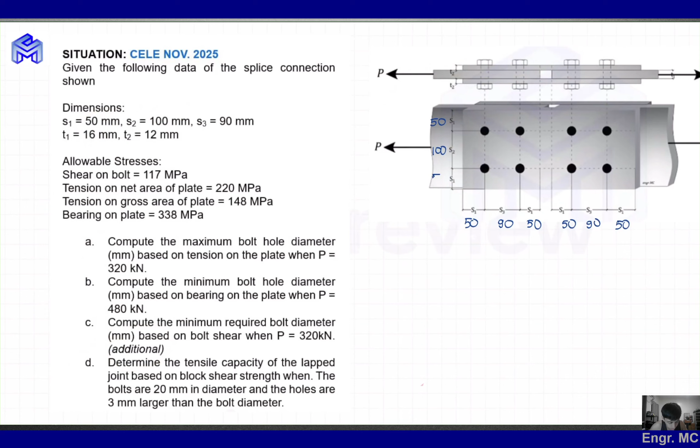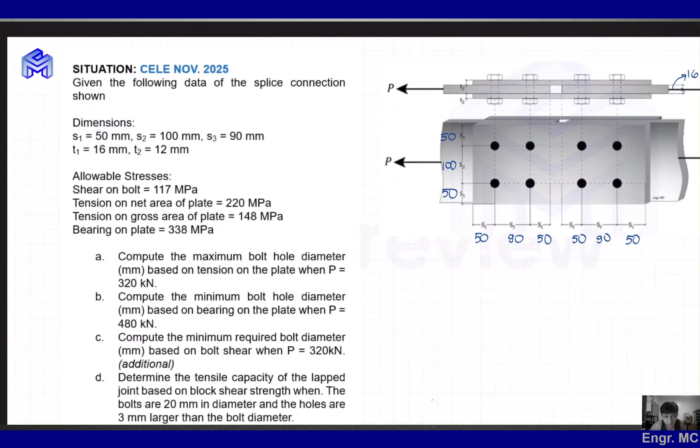Now for the thickness of the plates. The plates in the middle, T1, are 16 mm thick. And here we have two plates of 12 mm each.

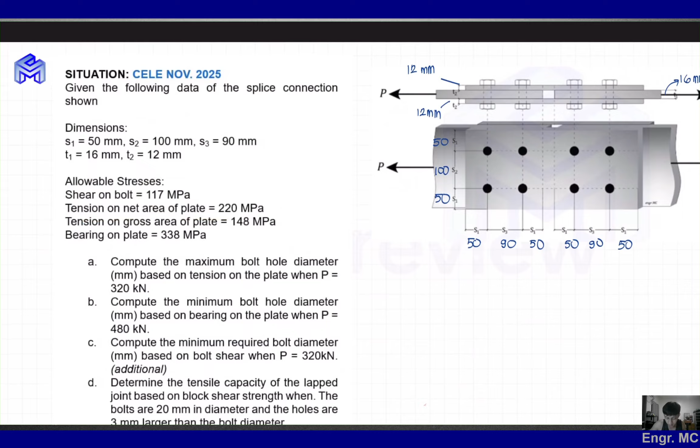The allowable stresses given are: shear on bolt, 117 megapascal; tension on the net area of plate, 220 megapascal; tension on gross area of plate, 148 megapascal; and bearing on plate, 338 megapascal.

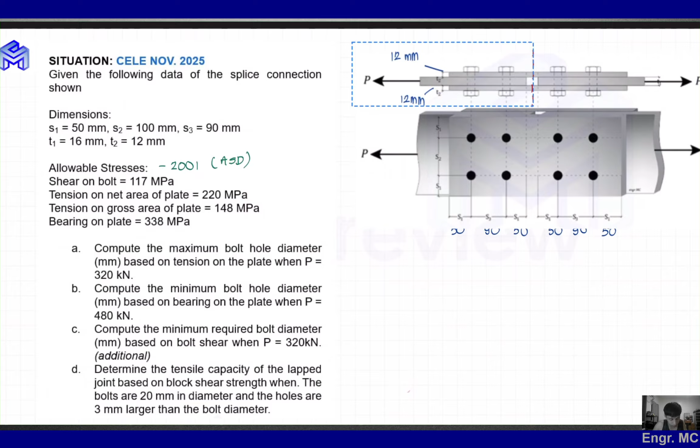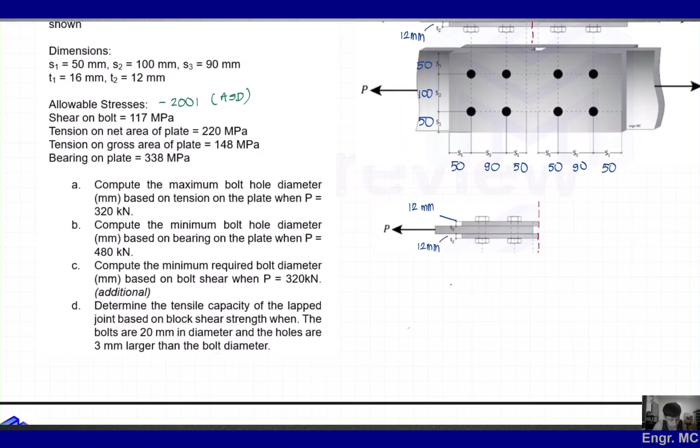Considering the left portion, this is what we see. We cut here, and here, and also cut there. Here we have a force P acting at the middle plate. If this is force P, we have two plates that will counter it to maintain equilibrium. For equilibrium to be maintained, the upper and lower plates must react with an amount of P divided by 2. So P over 2 here, and P over 2 here as well.

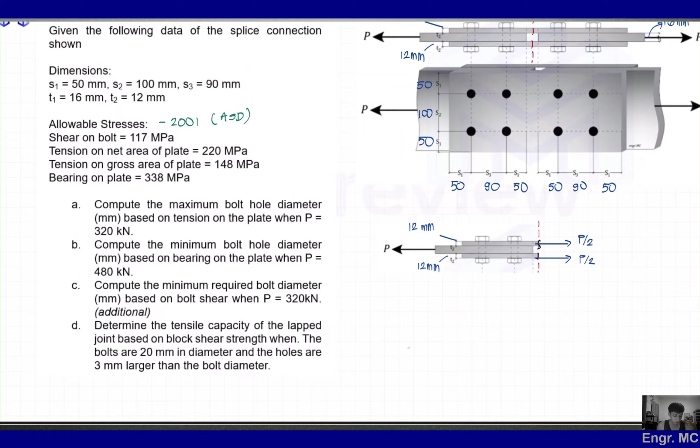I hope you can imagine this, guys. This is our analysis here. Let's just consider the left portion of the plate, not the whole thing. So basically, the bolts we'll consider here are only 1, 2, 3, and 4. Now what about the plate thickness we should consider? We already know only 4 bolts are considered instead of 8, but the question is, what thickness of the plate should we consider? This is 16 mm.

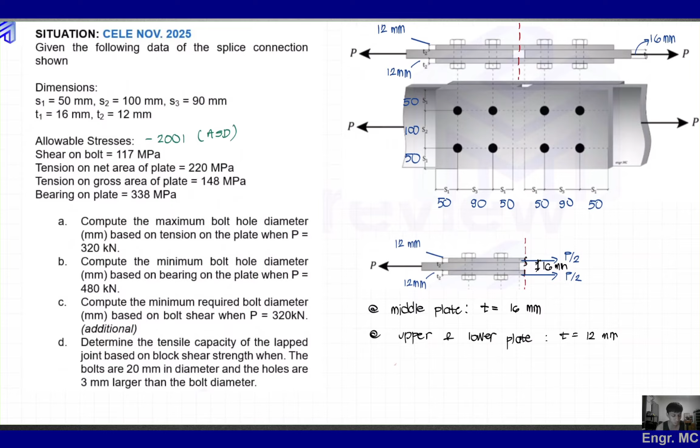Let's check this. At the middle plate, the one in the center, its thickness is 16 mm. Let me write that: at middle plate, the thickness is 16 mm. And for the upper and lower plate, we have two plates of 12 mm each. Let me write: at upper, we have a thickness equivalent to 12 mm. But take note, since there are two of them, we need to multiply by 2. So the thickness considering the upper and lower is 2 times 12, which equals 24 mm.

Now we need to choose which plate will govern. As you can see, 16 mm is less than the 24 mm combined thickness of the upper and lower plates. So basically, we're going to use the 16 mm plate. Therefore, use 16 mm plate — this is what we'll use throughout our solution. We neglect the 24 mm because the capacity we'd get there is larger since the thickness is larger.

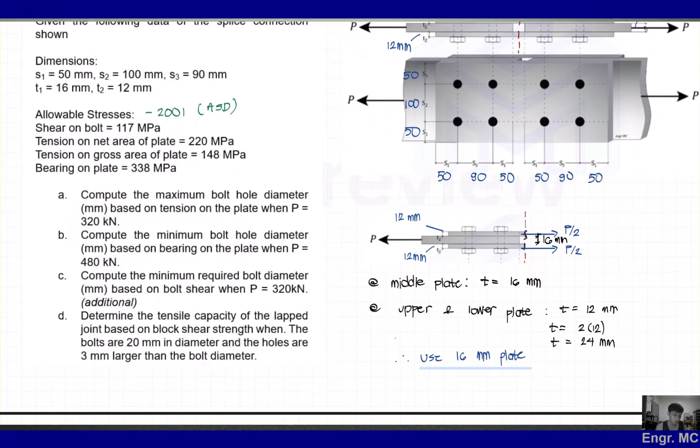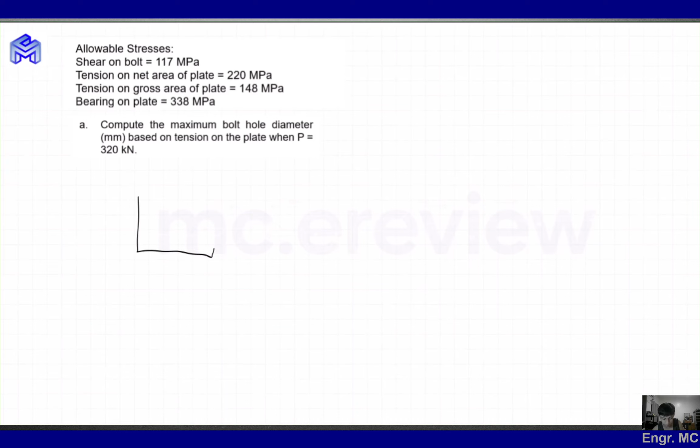Let's go to letter A: compute the maximum bolt hole diameter based on tension on plate when P is equal to 320 kN. Let me draw this — this is our plate. For example, let's consider the one at the middle. And of course, we cut here. And here we have a force P, that is equivalent to 320 kN. So we have 320 kN here.

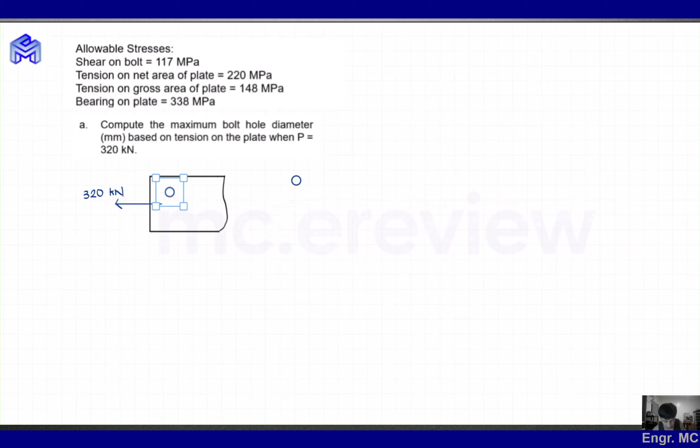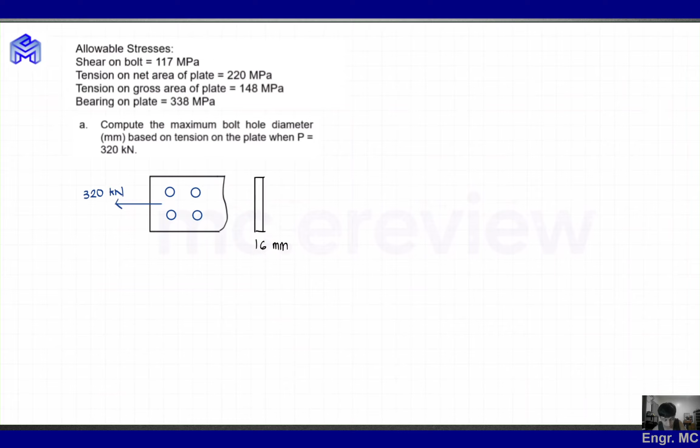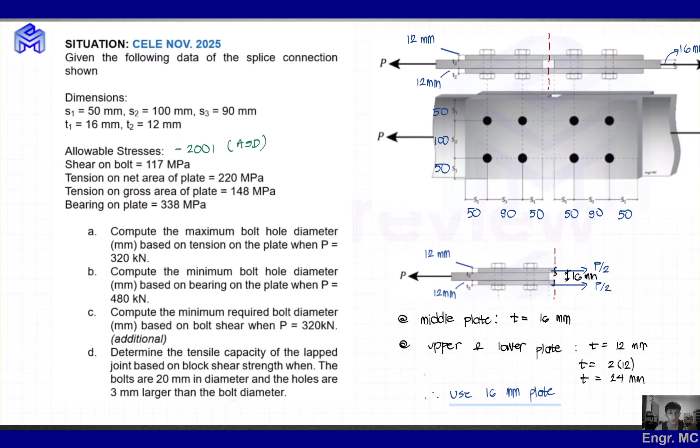Again, only 4 bolts will be considered here. Let me draw the bolts: 1, 2, 3, and 4. The thickness we consider here again is the 16 mm plate. It's hard to draw here, but the thickness of this is 16 mm. Now what width should we consider? Of course we base this on our figure. We have 50 plus 100 plus 50, that is equivalent to 200 mm. So this is 200 mm.

So the first question is the maximum bolt hole diameter, that is DH. DH is what's being asked, given that our P is equal to 320 kN.

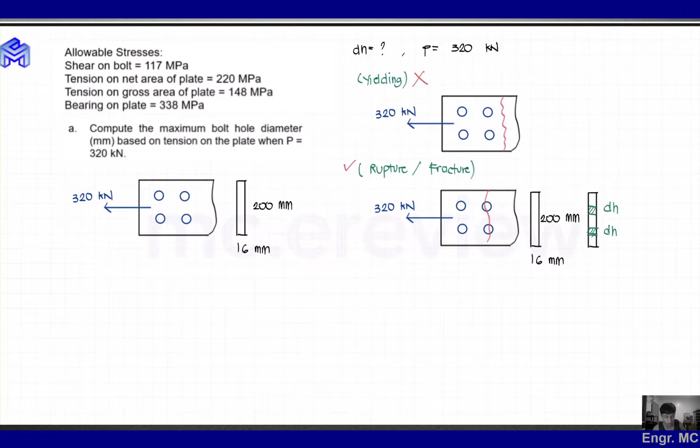And guys, diameter ng hole ang kino-consider natin dito, hindi diameter ng bolt. That is why sa problem natin, bolt hole diameter po yung tinatanong. So paano ba natin to isa-solve? Alam natin guys na yung design philosophy natin palagi is dapat yung allowable is always greater than the actual.

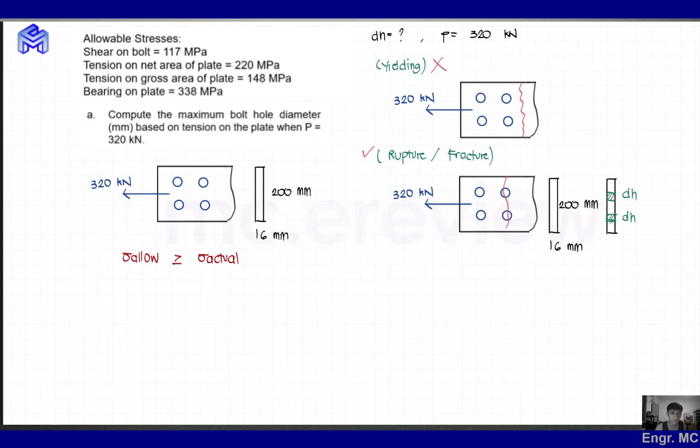Itong actual guys ay kukunin po natin sa ating given na parameters. Pero itong allowable naman, given na siya sa problem natin. So we have given na allowable stresses. Among the four, ano po yung gagamitin natin dyan? Itong tension ng gross area ay pang-yielding po ito, take note guys. Ito namang dalawa, itong shear on bolt and bearing on plate, ibang scenario na po yan.

Kapag tension on plate po yung pinag-uusapan, ito po yan. We have tension on net area and we also have tension on gross area. Take note, itong pangalawa on gross area ay sa may yielding po yan. So therefore, we're going to make use of our tension of net area. Ito ang may consider natin.

So dito, we have yung stress natin, that is equivalent to P over A. Tensile stress or allowable stress, equivalent lang po yan sa actual stress. At alam natin, ang actual stress ay equivalent lang sa P over A. So therefore, sigma allowable or stress allowable is greater than or equal to our P divided by A. Force over area lang to guys.

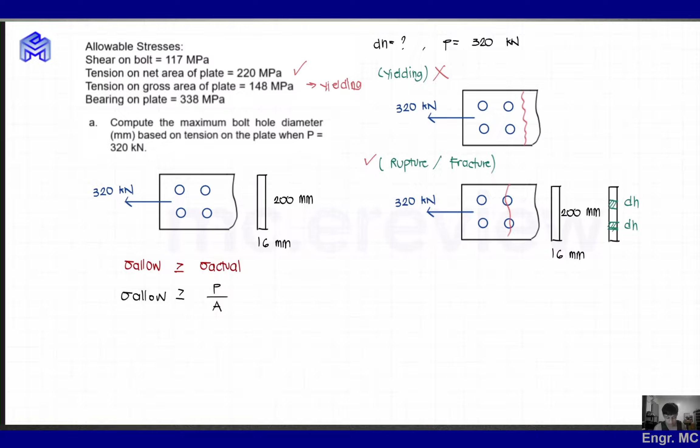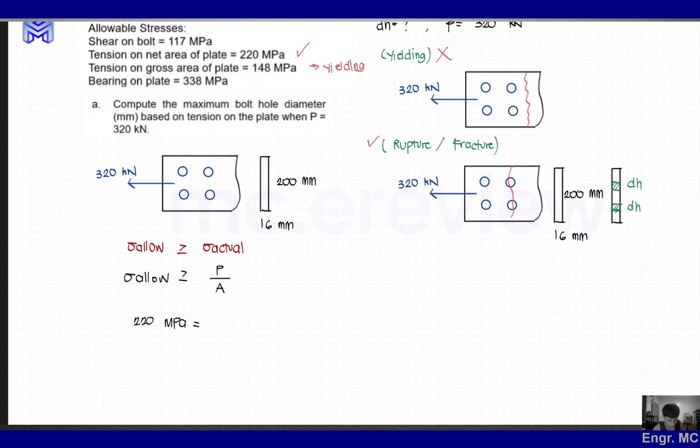As you can see dito, we have yung allowable stress natin given naman na yan sa problem, that is 220 megapascal. And then yung P natin is given, that is 320 kilonewton. So for unit consistency, mag times 10 raised to 3 na lang po tayo para ma-convert siya into Newton, divided by our area. So dito anong area po yung i-consider natin?

Take note po natin guys, na kapag tension on net, ang kukonsider nating area dyan ay yung area net. So therefore, masasolve natin dito si area net. Ito pala ay greater than or equal. So ang area net po natin dito is equivalent sa 320 times 10 raised to 3 divided by 220, that is equivalent to 1454.545 mm squared. Ito guys, itong area na ito, dapat yan na po yung minimum area.

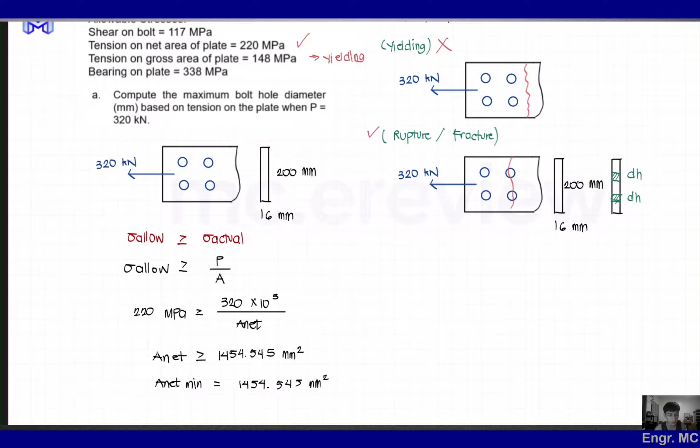Okay, so tandaan po natin yan guys. Yung area net po natin should be greater than or equal to 1454.545 mm squared. Or sa madaling salita, ito po yung ating area net minimum. Dito, design philosophy po natin, dapat yung area net na isosolve natin should be greater than or equal to area net minimum, kasi minimum na po ito, bawal po tayong bumaba pa sa area na ito. So therefore, we have here, yung area net minimum, kailangan lesser than or equal po siya sa area net na masosolve natin later on.

At saan nga ba equal ang area net natin? Ang area net po natin equal lang po yan sa area gross, ibawas po natin yung area ng butas. Okay, so ito po yung area gross natin, that is 200 times 16. At ibawas po natin siya sa area ng butas. So area net po natin, we have here area gross na 200 times 16 minus yung area ng butas na dito we have dalawang butas. So 2 times yung hole na i-consider natin, that is yung unknown sa problem, dh, times the thickness, that is 16 mm. At equate lang po natin to sa 1454.545.

Ayan, so therefore dito, masasolve po natin si dh. Okay, so solve ko lang guys. Now, we have here, 1454.545 is equal to 200 by 16 minus dalawang diameter ng hole times 16. Okay, so this give us 54.545 mm. We have here, diameter ng hole, that is equivalent to 54.545 mm. Or ito guys, yung ating inequality sign, that is lesser than or equal. So lesser than or equal din po ito by 54.55 mm. So ito na po yung sagot natin.

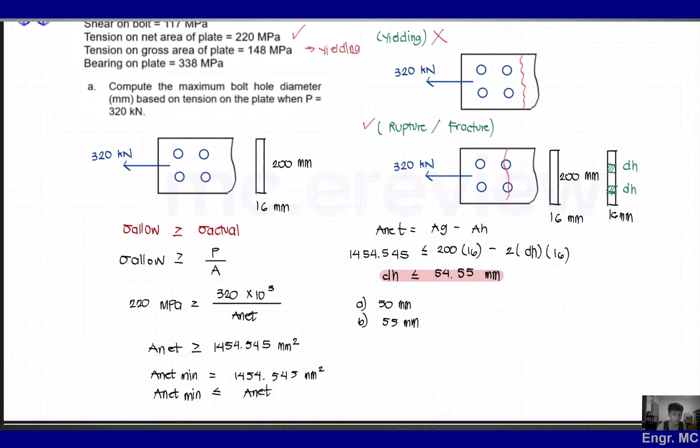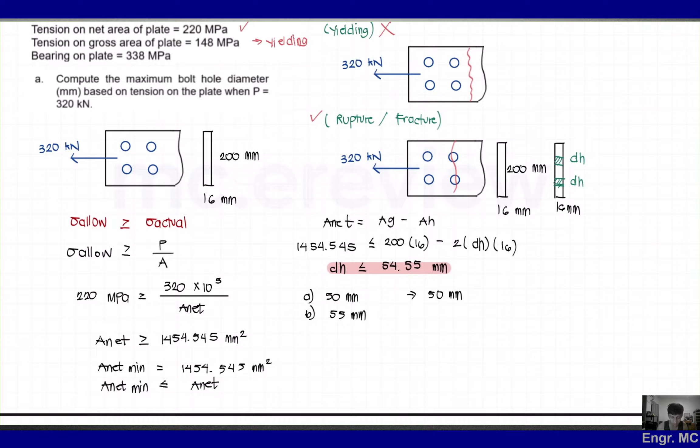So basically, 50 mm po yung gagamitin natin. Pero kung gusto nga natin siyang i-check, let us try to use yung 50 mm na diameter ng hole. So using 50 mm diameter ng hole, di ba we have yung formula na allowable, which is dapat kailangan mas malaki po siya o equal sa actual. So ito naman palagi yung design philosophy natin dito sa kapag nagde-design. Okay, so allowable natin since given naman po yan, we have 220 megapascal.

At kailangan hindi po siya lumampas, check natin kung lalampas nga ba o hindi. So hindi pa natin alam yung sign ng inequality dito, kung greater than pa siya o less than. Check natin, actual natin we have P over A lang po yan. So dito, 320 times 10 raised to 3 divided by the area. At ang area po natin dito ay area net. At ang area net natin, again, that is area gross minus area ng hole. So dito, 200 by 16 minus dalawang 50 times 16.

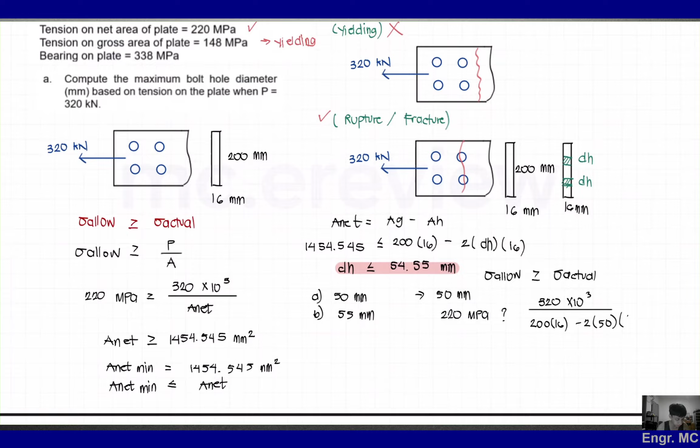Okay, so therefore dito, masasolve po natin o mako-compare po natin. So let us check guys. We have here 320 times 10 raised to 3 divided by 200 minus... ayan, so this gives us 200 megapascal. At as you can see, yung 220 megapascal na allowable natin ay mas malaki siya sa actual na na-solve natin na 200 megapascal. So therefore, check tayo dito, nasatisfy po natin yung design philosophy na our allowable should be greater than or equal sa actual.

Okay, how about kapag ginamit naman po natin si 55 mm? So using 55 mm naman, actually ito lang din yun. Copy ko na lang siya para hindi ako mahirapan masyado.

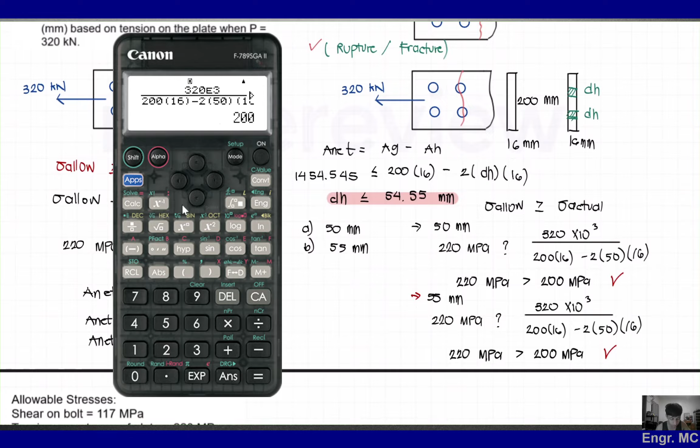Okay, so what if naman ang gagamitin natin ay si 55 mm. So check natin guys. Okay, so ito, palitan ko lang, gawin kong 55. And then check natin sa calculator, no? Gawin natin itong 55. At as you can see dito, ay lumaki po yung stress natin. Okay, at as you can see, nag-exceed na po siya sa 220 megapascal na allowable. So therefore, ex tayo dito.

Okay, kasi lesser than po siya, ilan yan? 222.22 megapascal. Okay, so therefore ex tayo sa 55, check po tayo sa 50. So nasatisfy po natin yung ating inequality sign dito na dapat yung diameter ng hole should be lesser than or equal to 54.55, and that is 50 mm. So between these two, gagamitin po natin si 50 mm.

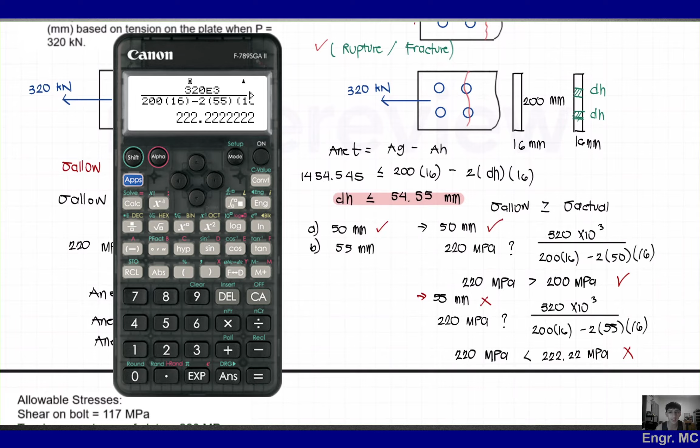Okay, so medyo nakakalito siya guys, no? Pero in this case lang naman yun. Sa mga problems na na-encounter ko, palagi naman siyang round up. Dito lang talaga sa rupture o dito sa area net. Okay, ayan, so I hope na nasundan niyo itong letter A. At ayun, check ko guys, so i-ano ko na siya, ganyan, para kung gusto niyo mag-screenshot, makita niyo ng buo yung solution.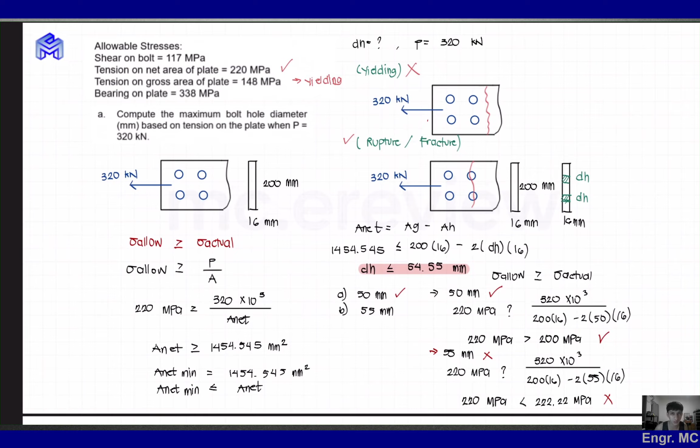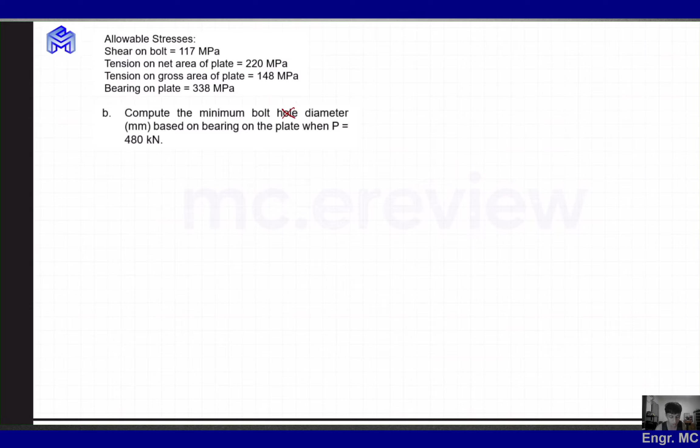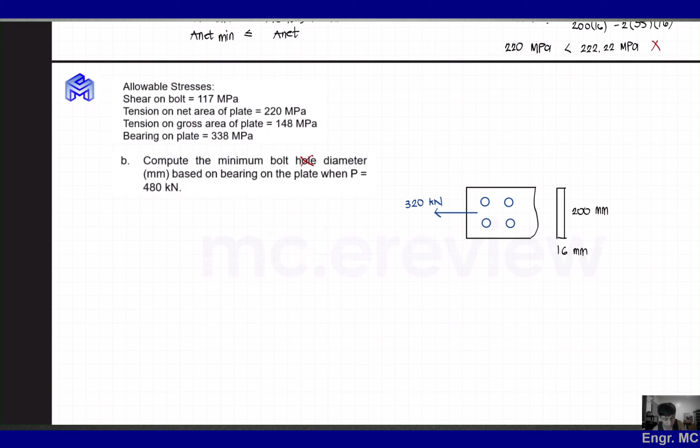Okay, so proceed naman tayo dito sa letter B naman. For letter B, dito, bolt diameter po yung tinatanong. So dapat ito na bolt diameter, hindi siya bolt hole. Okay, based on the bearing on the plate when P is equal to 480 kilonewton. So this time guys, ay bearing sa plate naman yung i-consider natin. Okay, so copy ko lang ulit to baka magamit. Ayan, so para lang tayong nag-extrema dito sa letter B, kasi bearing po yung tinatanong. Okay, so ang tinatanong sa atin is si diameter ng bolt.

Given that, our P is 480 kilonewton. So here we have the allowable stress, which should be greater than or equal to the actual stress. And here, recall our formula for actual stress, that is P over A. So actual stress is equal to P divided by area.

But in this case, the area bearing is what we consider. So what is area bearing? That is P over the area bearing, which is N times diameter of bolt times thickness. Since you've already studied steel design, you should be familiar with this. And you should know that when we talk about bearing on bolts, the formula is number of bolts times diameter of bolt times the thickness of the plate.

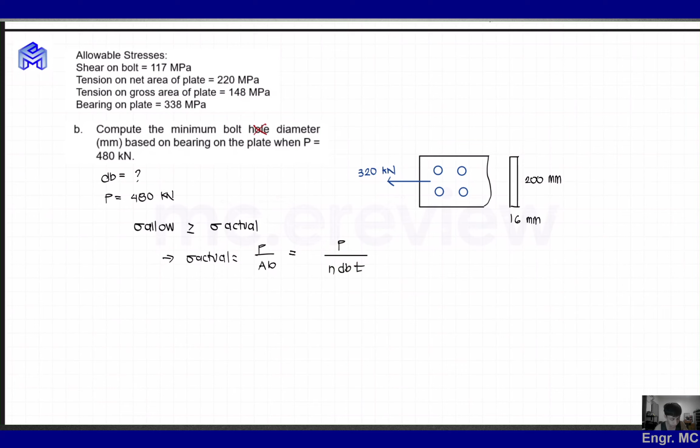In this case, number of bolts is equal to 4, and diameter of bolt is the unknown in the problem. And our thickness is 16 mm. So let's substitute.

We have here 300... what is this stress we'll use? So from our given allowable stresses, we'll use the stress for bearing on plate, and that is 338 megapascal. So here, 338 megapascal should be greater than or equal to our actual stress.

That is equal to 480 times 10 raised to 3 divided by the area bearing. The area bearing is 4 times diameter of bolt, which is unknown, times the thickness, that is 16 mm. So what is the diameter of the bolt?

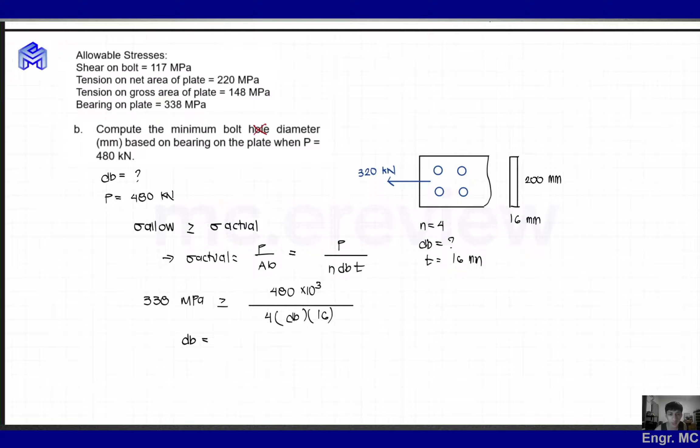Let's solve this. We have here 338... let me cross multiply so it's faster to shift solve. Actually, I don't even need to shift solve, let's do it directly. We have 480 times 10 raised to 3 divided by 338 times 4 times 16. This gives us 22.19 mm.

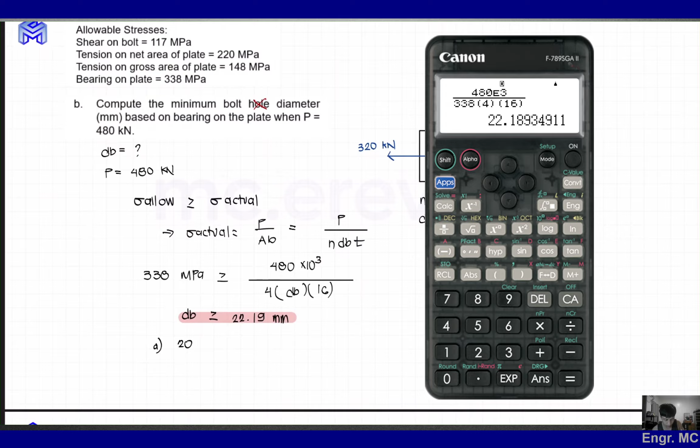So our diameter of bolt should be greater than or equal to 22.19. Now what if we're given choices, since it's multiple choice in the board exam. What if letter A is 20 mm, and letter B is 25 mm? Since it should be greater than or equal to 22.19, we cannot go below that. So in this case, we round up. Therefore, the answer would be the 25 mm diameter of bolt.

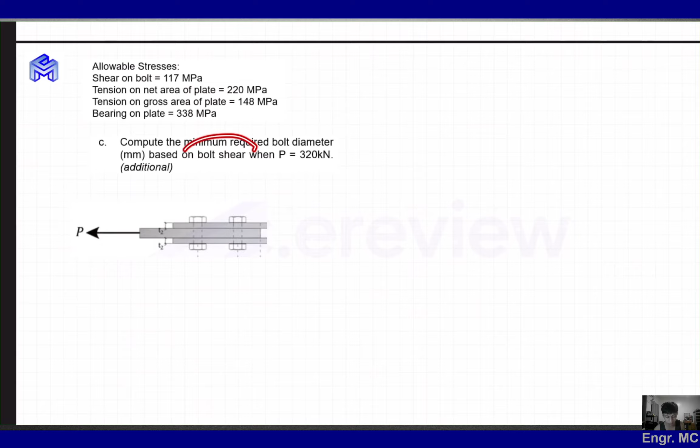Here, the given shear on bolt is 117 megapascal, and that's what we'll use. The question asks for the minimum required bolt diameter, dB. If P is equal to 320 kilonewton.

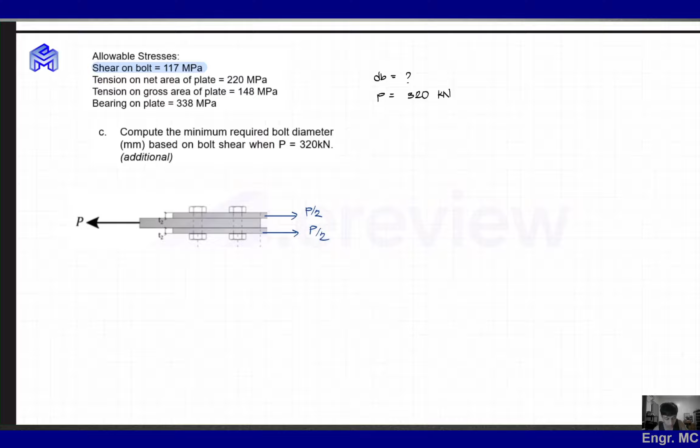Again here, this will react as P over 2, since there are two. But we can't use that, because the plate in the middle is what governs. Our given P here is 320 kilonewton, and again, the middle plate is 16 mm.

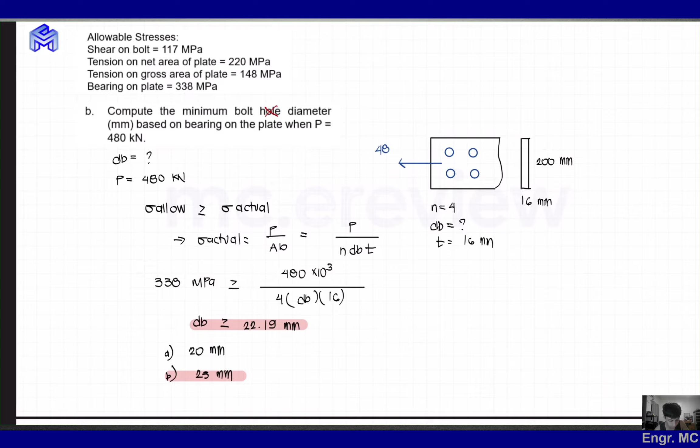Let's recall our formula again: allowable should be greater than or equal to the actual. Our allowable here is 117 megapascal. And for actual, we have P divided by area, where P is equal to 320 kilonewton, divided by our area. This time, the area we consider is the area in shear. So what is the area in shear here?

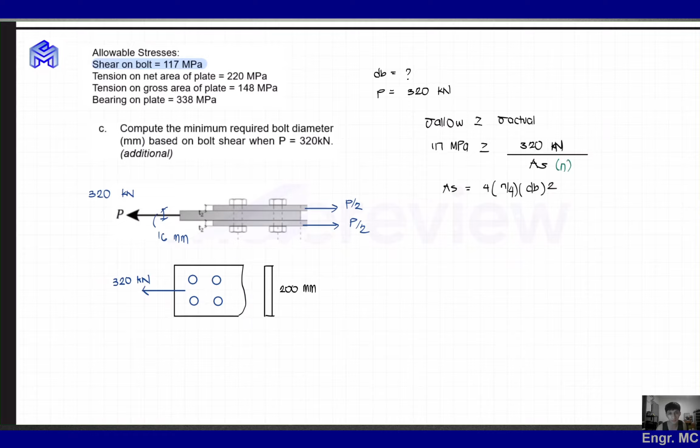Let's check - here we have 4 bolts. So therefore, the area in shear is 4 times pi over 4 times diameter of bolt squared. But take note, don't forget this - there's also a multiplier N. What is this N we multiply? That depends on whether it's single or double shearing. When it's single shear, our N is 1. But when it's double shear, our N is equal to 2.

Okay, so in this case guys, as you can see, nagkaroon po tayo ng double shearing. So isa dito at isa rin po dito. So N equals 2 po tayo.

Ayan, so substitute lang natin. We have here 117 megapascal should be greater than or equal to 320. Mag-times 10 raised to 3 na lang ako para ma-Newton po siya, divided by yung area po na shear na 4 times pi over 4 times diameter ng bolt squared na known, times 4 na bolt.

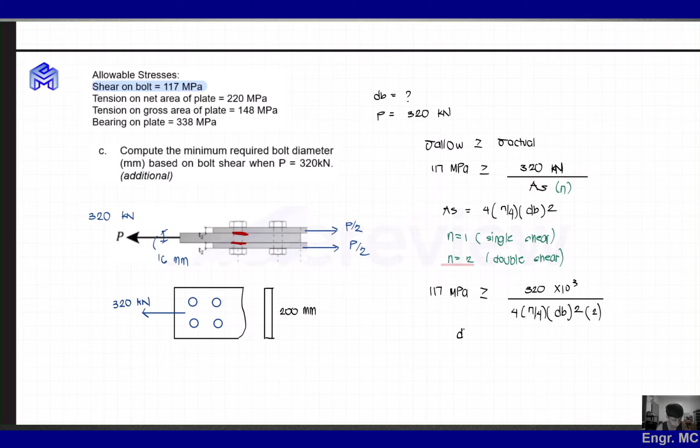I mean, times 2 pala, kung single or double shearing po siya. So therefore dito masasolve natin si diameter ng bolt, at kailangan greater than or equal po siya sa masasolve natin.

So check natin guys ulit. We have here 117 times 4 times pi over 4, times 2. Ano ba itong ginagawa ko? Okay, so ito we have 320. Ayan, tapos square root ko na lang. Ito ay 20.86 mm, so diameter ng bolt natin is 20.86 mm.

So ito na po yung sagot natin. Pero what if binigyan po ulit tayo ng choices, no? Halimbawa letter A natin, 20 mm, and then letter B naman ay 22 mm.

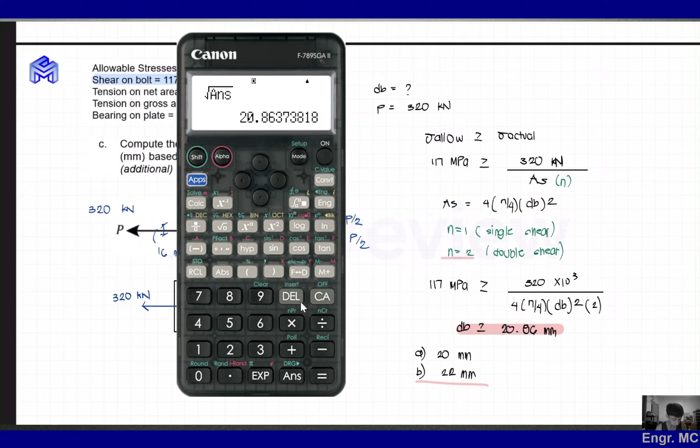So dito, since greater than or equal po yung inequality sign natin, kailangan mas malaki po dapat sa 20.86. So therefore ang sagot natin dito is ito pong 22 mm. Okay, so yun yung letter C natin, no?

And lastly, letter D naman po tayo. For letter D, determine the tensile capacity of the lap joint based on block shear strength when the bolts are 20 mm in diameter and the holes are 3 mm larger than the bolt diameter. So dito binigay po yung dB natin.

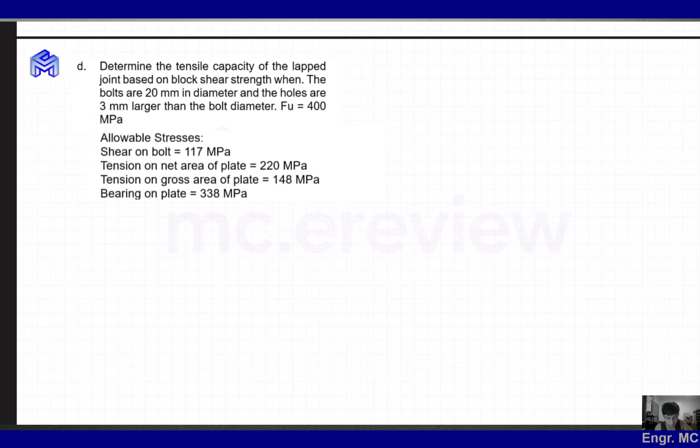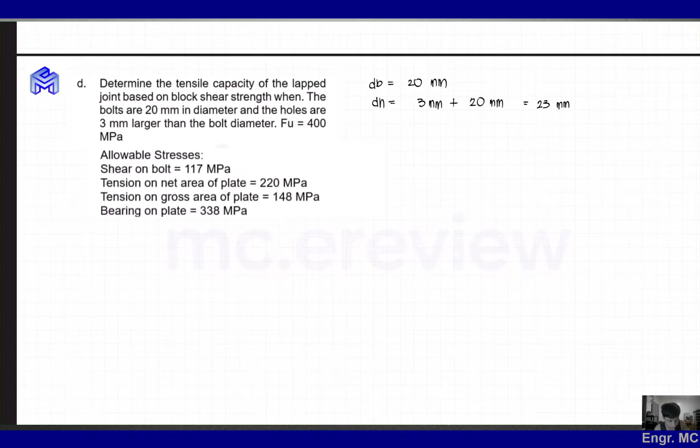So ang dB po na given is 20 mm, and sinabi dito na yung diameter ng hole is 3 mm larger than the diameter ng bolt, so equal po ito sa 23 mm. Ayan, and FU po natin given, that is 400 MPa.

Okay, so allowable stresses, binigay ulit na yung mga given. Pero dito, syempre, actually hindi na natin ito magagamit, guys. Okay, so block shear strength tayo.

Di ba kapag block shear, marami po tayong pwedeng pattern na mangyari, o marami pong pattern ang pwedeng mangyari kapag block shear po yung pinag-uusapan. So ano nga po ba yung mga pattern na i-consider natin when it comes to block shear?

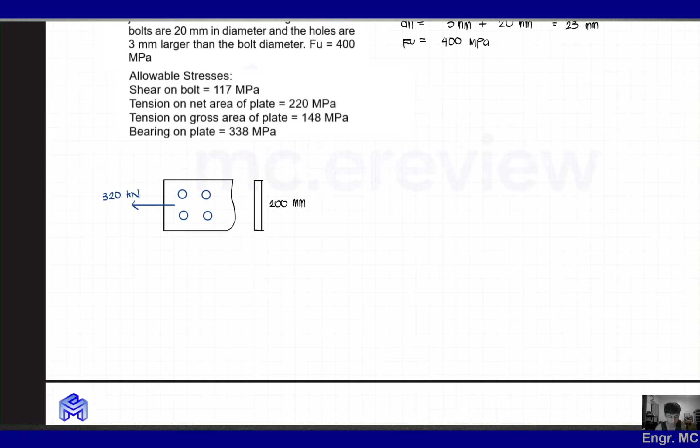Okay, so unang pattern dyan guys ay ito lang. Pwede pong yung pa-U. Okay, so ito yung una nating pattern na pwedeng i-consider, yung pa-ganto, iikot po siya pa letter U. And pwede rin po yung pa letter L.

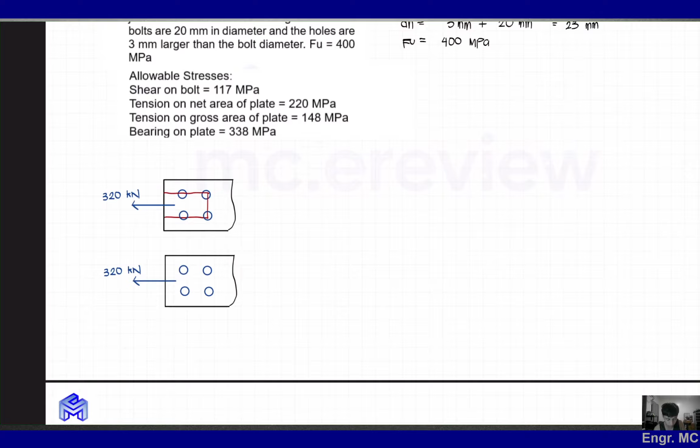Okay, nung exam ko, ang nag-govern ay si letter L. At kadalasan din kapag nagsosolve tayo, si letter L din po yung nag-govern. Pero hindi po yan palagi, not all the time ay nag-govern po si letter L. May instances din na nag-govern si letter U.

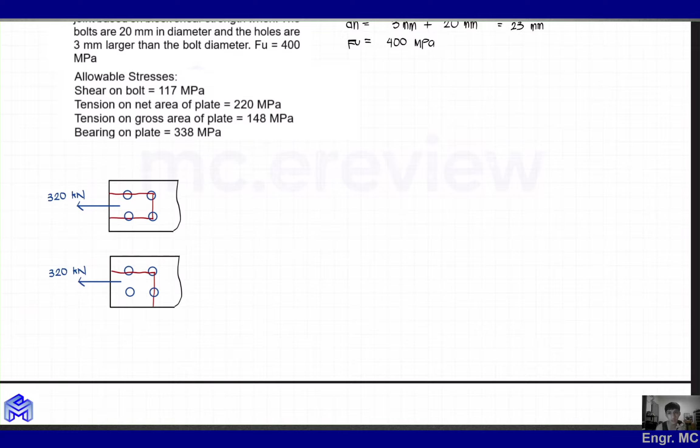So basically, we need to solve yung dalawang case o dalawang block shear pattern and compare po natin kung ano po yung magbibigay sa atin ng mas mababang capacity. Okay, so itong capacity po na tinutukoy dito ay, ano to guys, no, allowable.

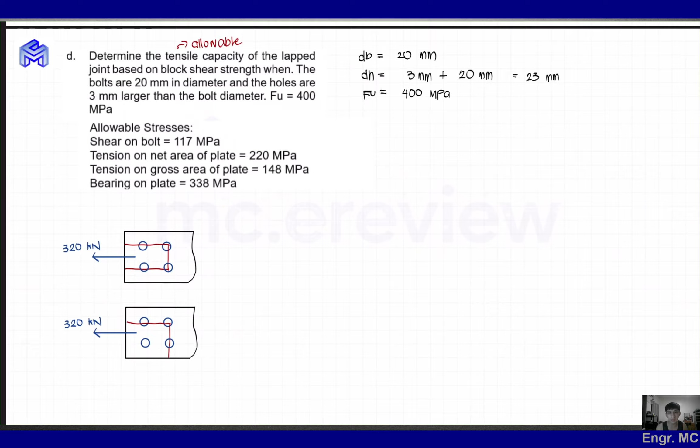At dito po guys sa block shear, dalawa po yan. Kapag NSCP 2015, recall lang natin guys, pero 2001 naman pinagamitin dito. Kapag NSCP 2015, we have yung formula for allowable na ang PN po natin ay 0.6 FU ANV plus UBS FU ANT.

Okay, and ang PN max naman natin ay ito, we have 0.6 FY AGV plus, ito same lang, UBS FU ANT. Okay, so ito po yung case natin kapag 2015.

And kapag allowable, o ASD, yung ang PA po natin, equivalent po yan sa PN divided by 2. Kapag LRFD naman, ang PU po natin is 0.75 nung PN. Okay, ito guys, kapag NSCP 2015.

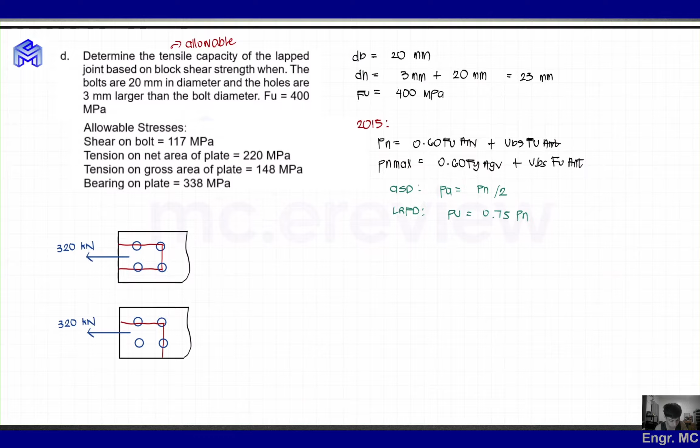And dito naman baka magtaka kayo ano po yung UBS. So in most cases guys, steel design, ang UBS po natin ay equivalent po yan sa 1. Okay, so therefore 1 divided by 2, 0.5. So parang dito lang din siya nanggaling sa PN.

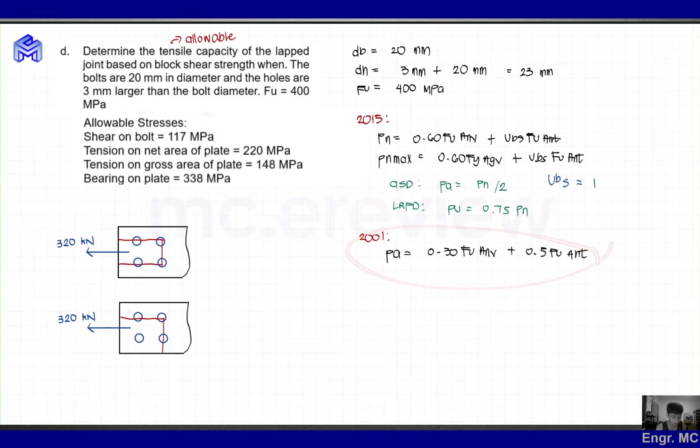Ang kagandahan kapag NSCP 2001, we don't have to compare dito sa PN Max. So rektahan na tayo sa formula na to. Okay, so yun guys, I hope na nasusundan natin so far.

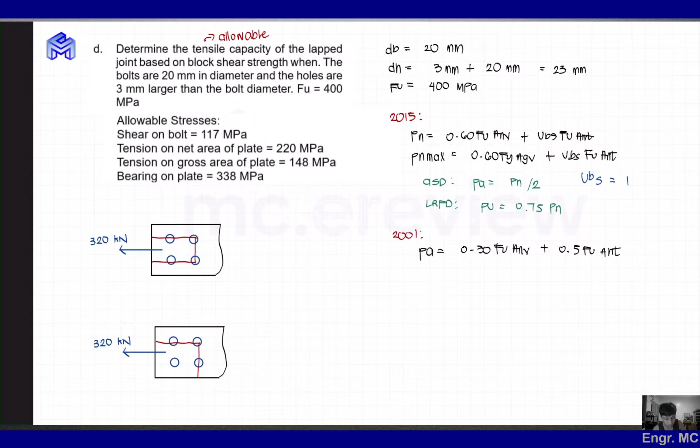So andito, sundan ito muna yung gamitin natin, yung case 1. So here yung two cases, case 1 and case 2. Okay, so ito pala na, ito yung hinanap sa problem, yung P, so PA. Okay, so lagay ko na lang, we have here yung case 1, and dito we have yung second case. So case 1 muna tayo.

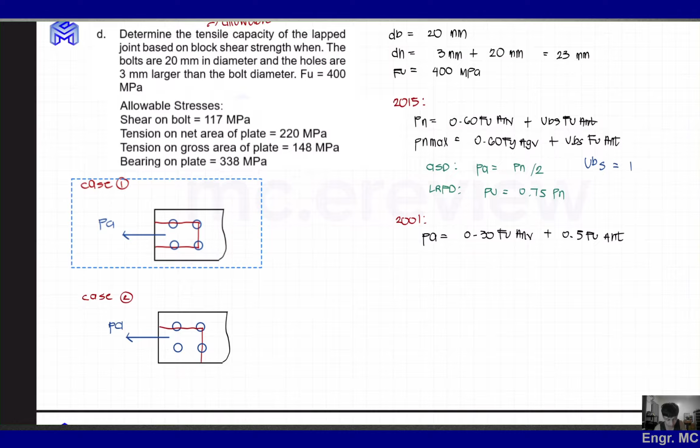Okay, and dito guys, no, kailangan makompleto natin yung dimensions. So lagay ko na lang din yung dimensions natin. We have here, yan. Ayan, so na ba itong dimensions na to?

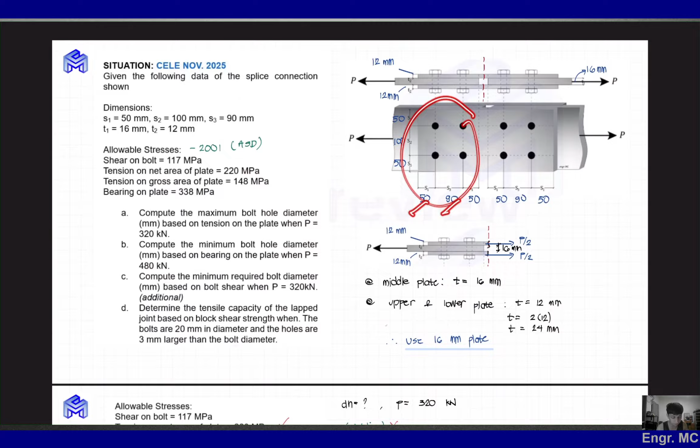Ito ay, we have, mahaba na ng solution natin. Ito yun guys, no? We have 50 and 90. Okay, so here 50 tsaka 90. So lagay ko lang din na we have 50 tsaka 90 dito. And dito naman we have 100 tsaka 50.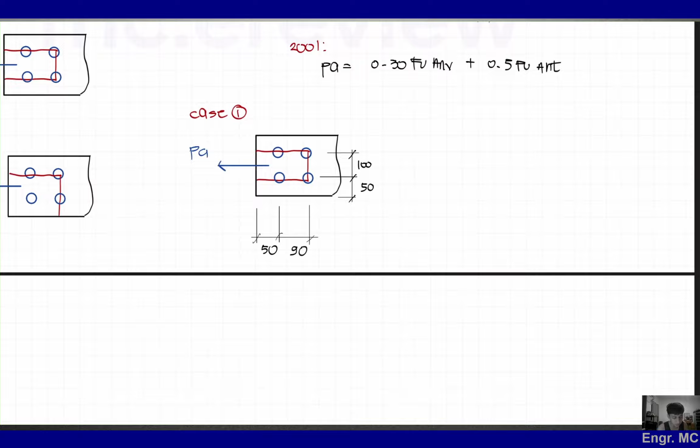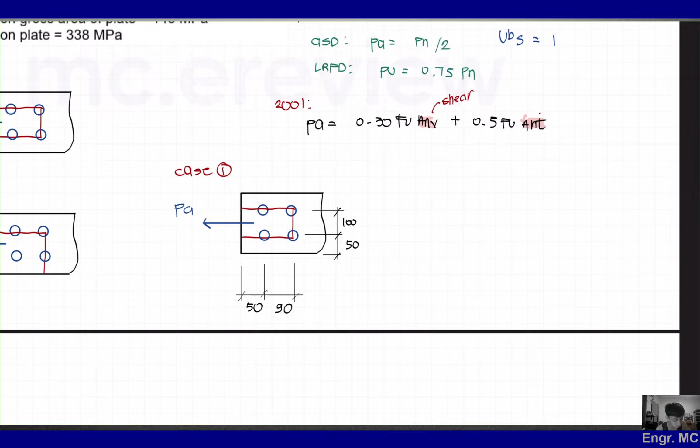Dito we have 100 tsaka 50 naman. Dito, we need to solve yung ANV, as well as yung ANT. Itong ANV guys, this only means na in-shear po siya. Yung V po dito denotes na siya po ay pang-shear, o area shear. Ito naman ay area tension, o ito yung tension ay yung perpendicular naman.

Therefore, kapag area ANV po tayo, yung area shear, ito po yung area na i-consider natin. Take note guys, na net po tayo, meaning to say, kailangan po natin ibawas yung butas. Yung N po natin dito, that denotes na dapat naka-net po tayo, o kailangan ibawas po natin yung butas. So in this case, we have isang buong butas dito, and dito naman we have yung kalahati. Yung thickness natin, same pa rin, 16 mm, at ito naman yung lapad po niya ay 140 mm.

Dito yung butas ay diameter po ng hole dito, and dito naman ay diameter po ng hole divided by 2. I hope na nasusundan nyo guys. Take note guys na ito nakapalibot po siya, naka-letter U, so basically dito ay mayroon pang i-consider dito for shear.

Ito naman po yung para sa tension natin. For tension naman, ito po yung area na i-consider natin. Share yung kalahati, kalahati dito, and dito rin kalahati po yung natamaan.

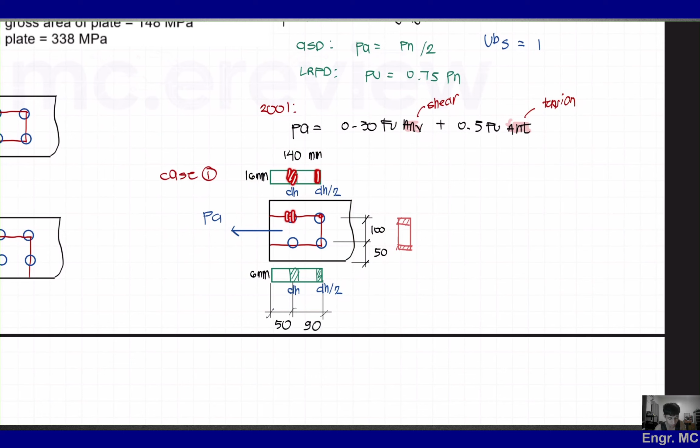Dito baka malito rin kayo sa mga diameter ng hole na i-consider. As you can see dito, isang buo po yung natamaan, dito naman kalahati kasi lumiko na po siya pa ganyan. Ito lang po yung area na effective dyan. Ito lang po yung area dyan, yung kalahati. And dito rin, as you can see, kalahati and kalahati, so dalawang kalahati po yan. Kalahati sa baba and another kalahati sa may baba, dito this time sa taas. I hope na-imagine ninyo guys.

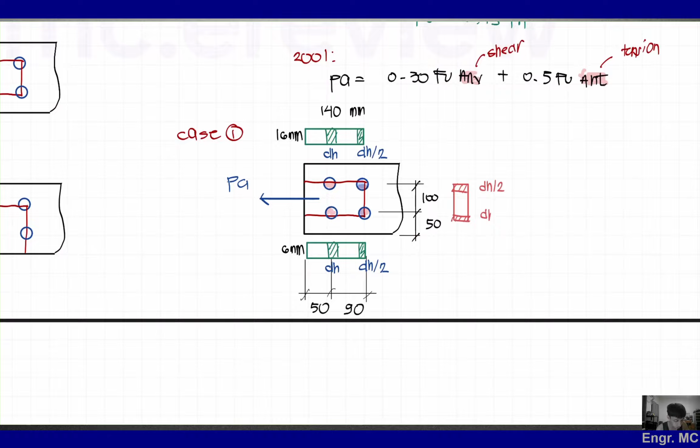Ayan, so ito po yan para mas may imagine. Kalahati dito, and dito naman kalahati sa may taas. As you can see here, DH divide 2, ito rin DH divide 2. So therefore, dito we have DH divide 2 and another DH divide 2. Yun lang yung challenging kapag nagpa-block shear, yung pag-solve ng mga areas.

Okay, ANV muna tayo. ANV natin, again, area net shear. Therefore, area gross, bawas po natin yung mga butas parallel sa ating force P. So, therefore, we have area gross minus area ng hole. Dito we have, yung area gross po natin ay ito guys, 140 times 16. Yan po yung area gross, yung hindi pa nababawas yung butas.

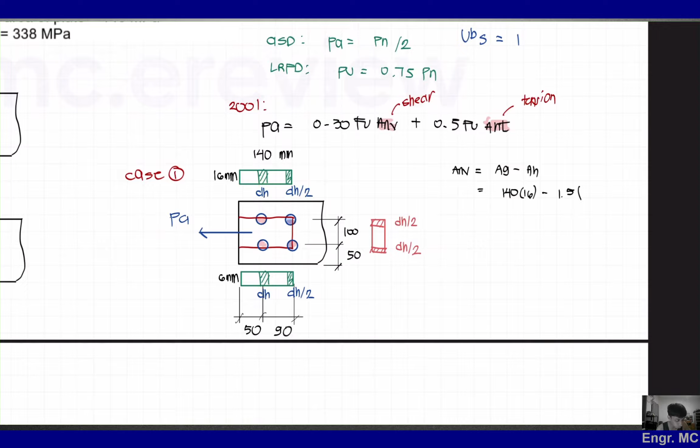Ang masasolve natin ANV, equivalent po yan sa, pakita ko lang din guys, yung ANV na masasolve. Dito 140 times 16 minus 1.5 times 25 times 16, at dito mag times 2 po tayo. So, we have here 3,280 mm squared. Check ko nga lang kung tama itong mga na-inputs ko. 23 mm pala, no? It should be 23. We have here 1688 times 2, 3376. So, 3376 po yung ANV natin.

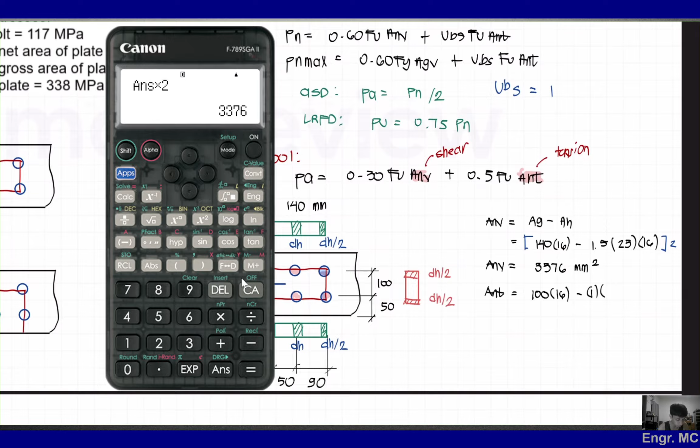Baka magtaka kayo guys kung saan po galing itong 1. That is yung DH divide 2 plus DH divide 2, or dalawang 1/2. Okay, solve ko lang din to. We have here 100 times 16, minus 1 times 23 times 16. Okay, so this give us 1232 mm squared.

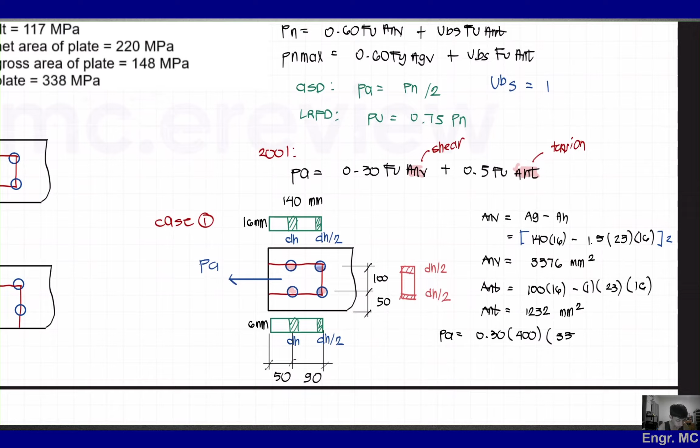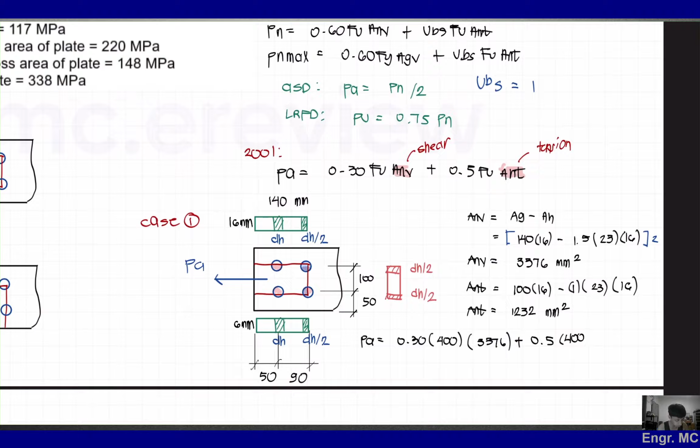Okay, dito masasolve na natin yung P allowable. Ang P allowable po natin equal lang sa, substitute lang po natin, we have here 0.30 times FU natin na 400 times ANV natin, ibaba ko lang itong calculation. ANV po natin is 3376 plus 0.5, sub ko lang to, 0.5 times FU natin na 400 times 1232 po yung ANT.

So therefore, masasolve nating PA dito, we have here 0.3 times 400 times 3376 plus 0.5 times 400 times 1232. Okay, so naka-Newton tong masasolve natin. I-divide lang po natin ng 1,000 para ma-convert siya into kilonewton. So this give us 651.52 kilonewton.

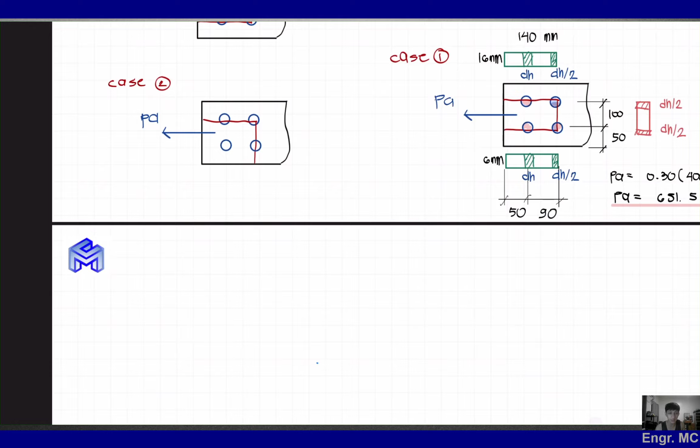At take note guys, hindi pa to yung sagot natin. Kailangan pa natin consider yung case number 2 o yung second pattern po natin for block shear. Dito sa case number 2, mas likely ito po yung mag-govern, at nung exam ko rin, ito yung nag-govern actually. Pero syempre, need pa rin nating i-check kung ito nga ba yung mag-govern, kasi hindi lahat ng case, ito po yung nag-govern.

So for case number 2, ito na po yung kukonsiderahin natin ngayon na area net shear, itong part na ito. Buo dito, isa po yan. Dito rin ay kalahati, at dito naman this time, buo tsaka kalahati. At hindi na po siya iikot, so hindi na tayo magta-times 2 mamaya.

Wait lang, hirap mag-drawing dito. Kung iikot sana siya, gaya nung kanina, kailangan pa natin itong i-draw dito. Pero in this case, hindi na, kasi dumiretso po siya sa baba. So dito kalahati po yung natamaan, at dito naman buo. So therefore, DH po ito naman DH divide 2, ito naman DH divide 2, at dito naman ay DH, o pareho po yung tig 1.5.

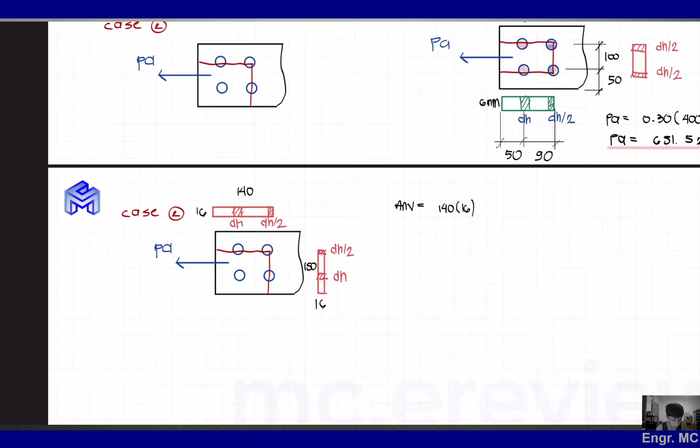Okay, at sa dimensions naman, ito ay 16, ito ay 140. Dito naman we have 100 tsaka 50, so therefore 150 po ito. At same pa rin, 16 po ito. So therefore, solve na natin Anv. Ito po yun, yung 140 times 16, ibawas po natin itong isa't kalahati, so 1.5 nung diameter ng hole na 23 times 12.

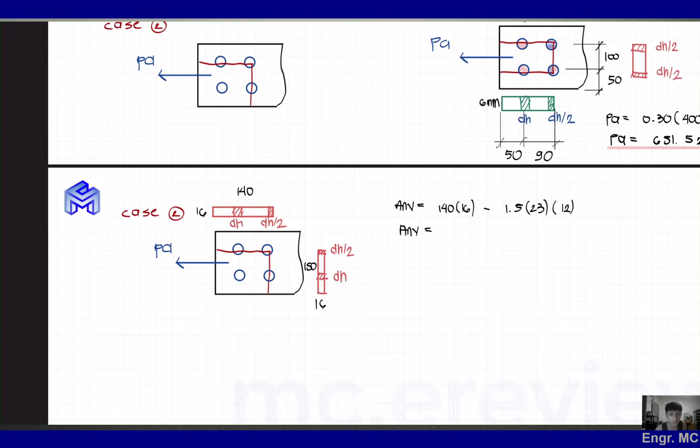So therefore, ang masasolve natin Anv dito, check natin. Ang Anv po natin dito is, we have 140 times 16 minus 1.5 times 23 times 12. Okay, this give us 1826. Tama ba? Check ko lang, 140 times 16. 16 pala to dapat, kasi 16 yung thickness ng ano natin. Okay, so ito po ay 1688.

Bilisan ko na nga para matapos na tong lecture na to. Okay, at Ant naman natin, ito po yun, yung 150 times 16, bawas po natin yung isa't kalahating butas. So here, 150 times 16 minus 1.5 times 23 times 16. So therefore, masasolve natin Ant ay equivalent naman po yan sa 150 times 16 minus 1.5 times 23 times 16. So this give us 1848.

So therefore, masasolve na natin si PA. Ang PA po natin is 0.3 times 400 times Anv po natin, Anv na 1688, plus Ubs o 0.5 nung Ubs times FU po natin na 400 times 1848. So therefore, masasolve nating PA dito, check natin guys kung ano po yung mag-govern. You have here 0.3 times 400 times 1688, and then plus 0.5 times 400 times 1848.